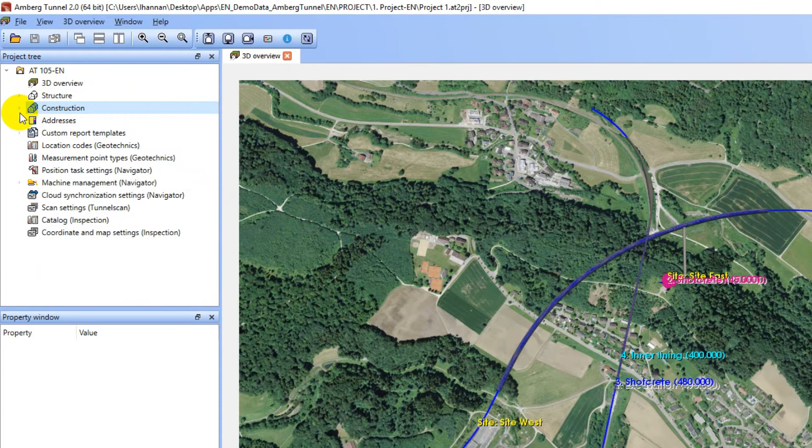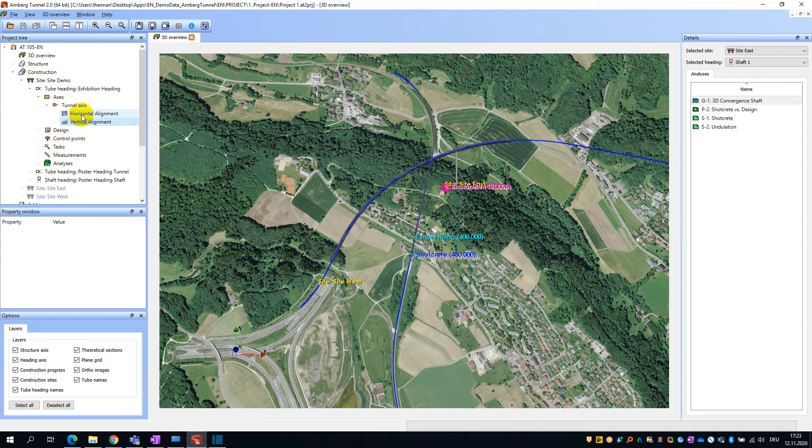The construction view of the project is a view of the project during construction. In the construction view of the project, you can create one or more sites. In each site, you can create one or more tube or shaft headings. A tube heading is a tunnel element with a non-vertical axis. Each tube heading will have an axis defined by a horizontal and vertical alignment. Both of these alignments describe the 3D curvature of the tube in space.

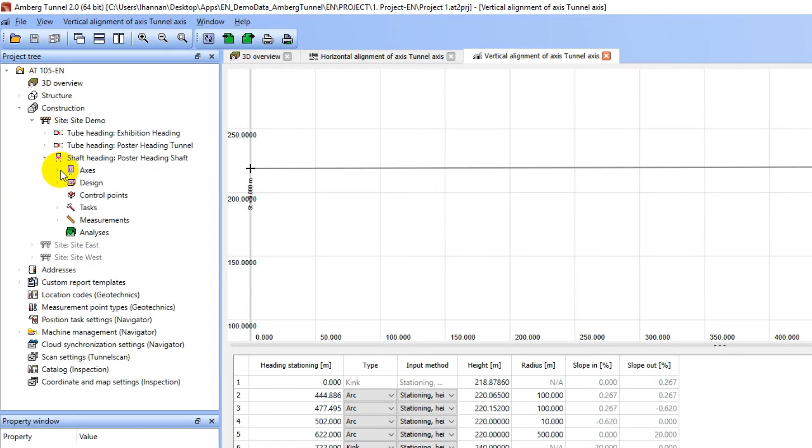A shaft heading is similar to a tube heading with the exception that it is vertically defined. By definition, a shaft heading is always defined by one straight element, with identical easting and northing values for the starting and ending points. For every site, a design node is automatically created. Underneath the design node, you will see the construction stages.

A construction stage in Amberg Tunnel holds the design information for a work step during tunnel construction. In this demo project, for our demo site, we have 3 construction stages defined. First, we have the excavation construction stage, followed by shotcreting, and then finally inner lining. Each construction stage can be made up of 4 elements: theoretical profiles, theoretical sections, transverse slopes, and block definitions.

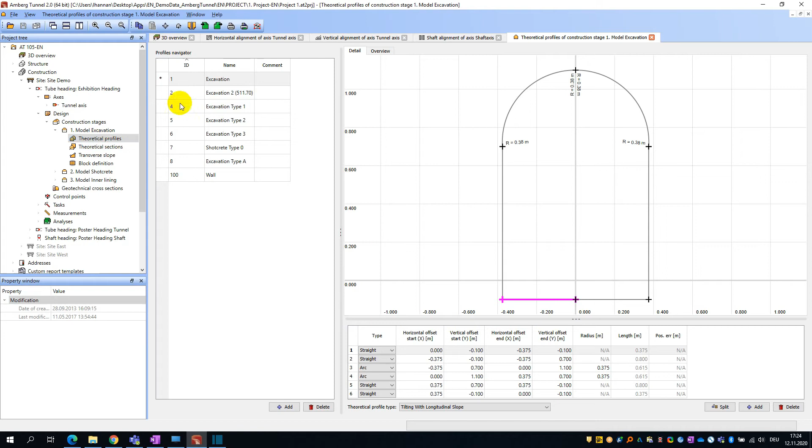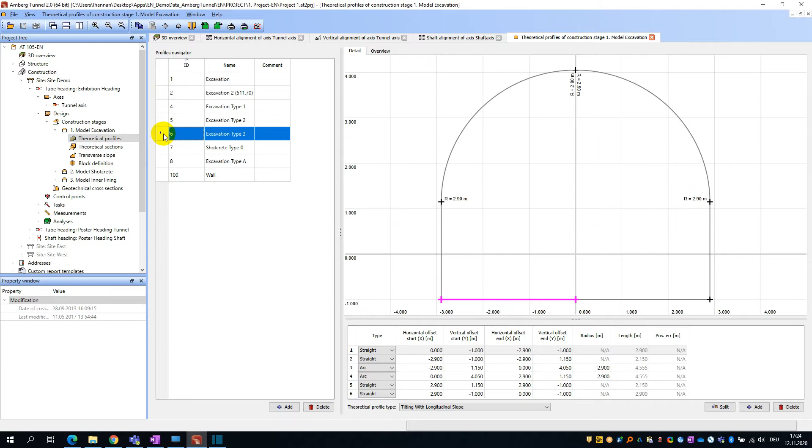The theoretical profiles describe the design geometry after completion of the construction stage. In this example, we are in the excavation construction stage, and these profiles describe what the excavation should look like in terms of size and shape. Theoretical sections are formed by joining together theoretical profiles along the heading axis. If 2 theoretical profiles that are different in size and shape should be joined together, Amberg Tunnel will interpolate between both profiles.

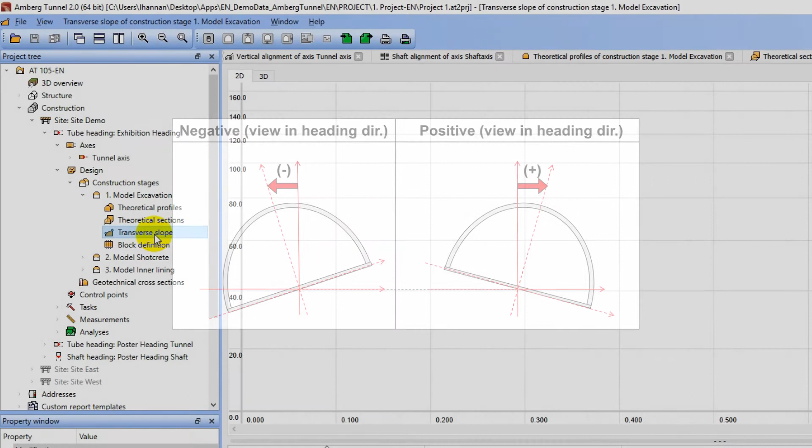The transverse slope definition is used for the rotation of the entire theoretical profile around the project site axis. This definition is used to incorporate slope or superelevation into your tunnel design. The block definition, like the transverse slope, is an optional definition used in your tunnel design. Each block consists of a start and end stationing and a description, and is used to facilitate the workflow of certain tasks.

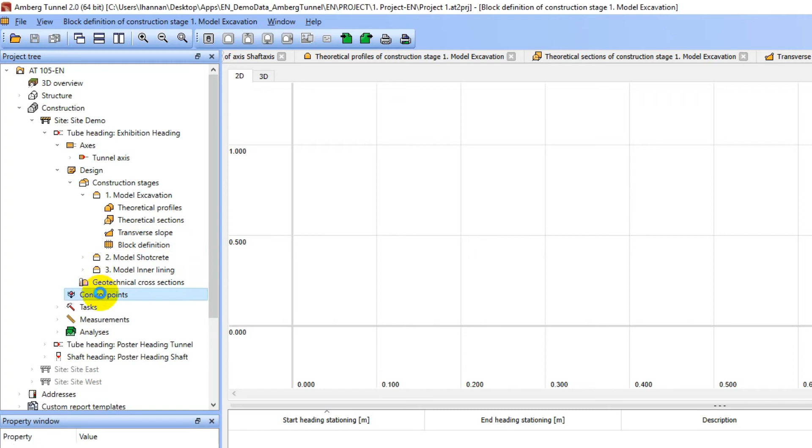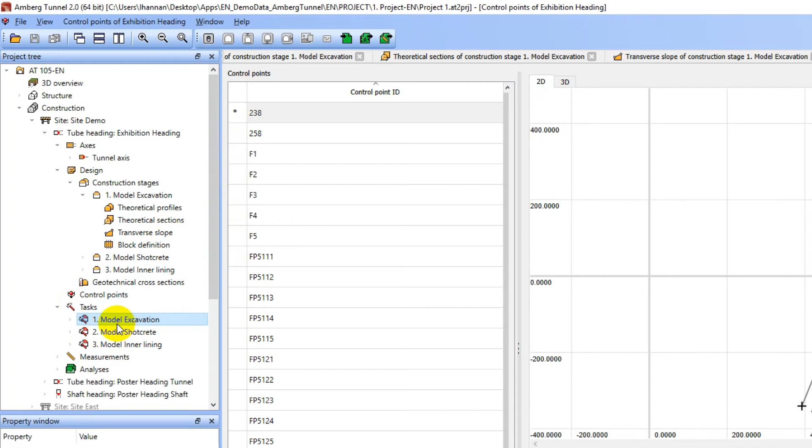For each tube heading, you will see a control points node. This is where the tube's control points are stored and managed. Next, we have for each tube or shaft heading the tasks node. This is where you can define Amberg Navigator measurement tasks for carrying out survey tasks in the tunnel. You will see that the task categories are mirrored according to the construction stages defined earlier. The tasks are organized automatically this way because you will likely have different task sets associated with the various different construction stages.

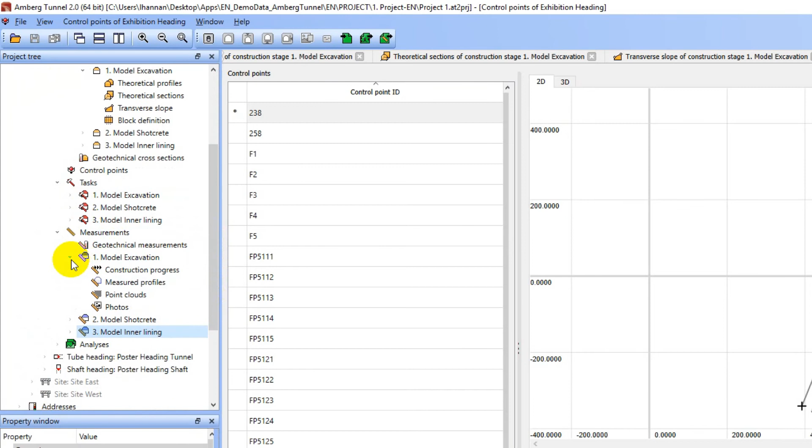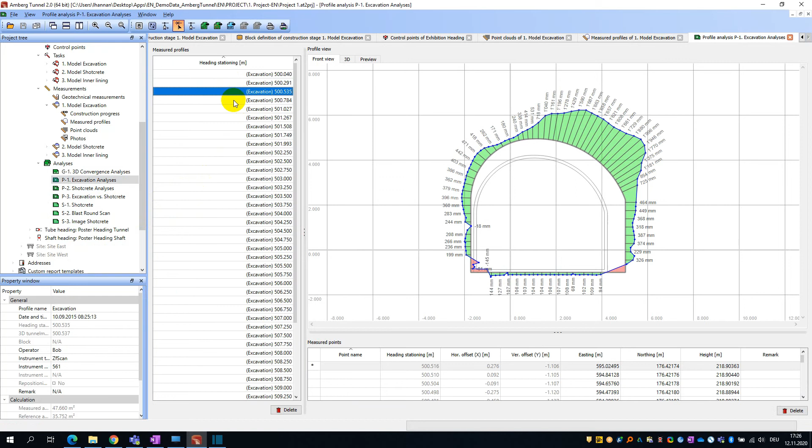Next, for each tube or shaft heading, you will find a measurement node, which is organized again as per the construction stages. Here you can view survey data collected from Amberg Navigator tablet software in the forms of measured profiles, point clouds, and photographs. And lastly, for each tube or shaft heading, we have a powerful set of analysis that can be carried out. If I open up this excavation analysis, we can see the overbreak and underbreak values at different heading stationings. There is a wide range of reporting and exporting options for each analysis.

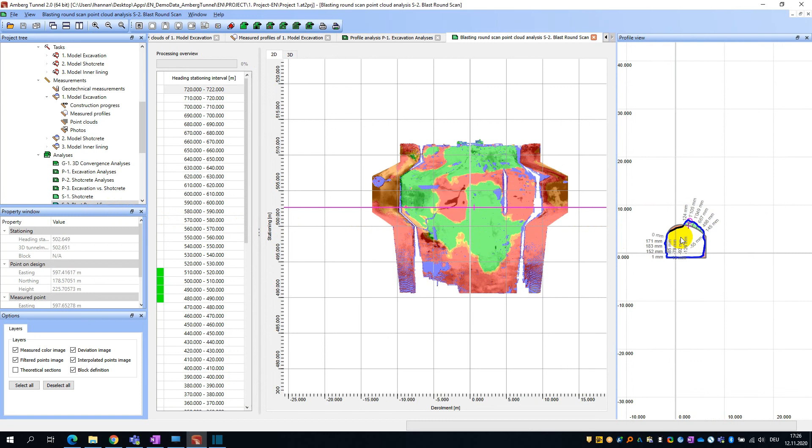I will take a look now at the blasting round scan analysis. Here we can see a colorized point cloud which corresponds to the deviation between the scan and the theoretical design. If you click on the 2D map, you can see the corresponding profile on the right hand side. This concludes our overview of the project tree in Amberg Tunnel.